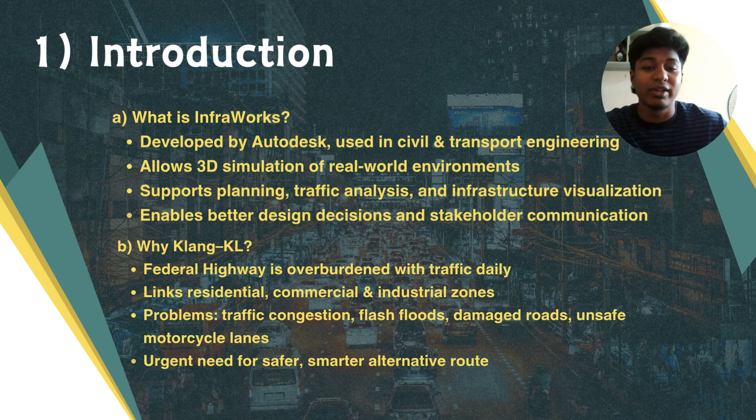Next we jump into the objective of our project. The first is to propose a new toll highway to reduce the pressure on the federal highway. Next, we want to incorporate smart tolling, solar powered lighting, an ITS system, and CCTV. We're going to design a safe, dedicated motorcycle lane. Then we want to build a flood resilient road section, especially in flood-prone areas like Klang and Shah Alam. We also want to use InfraWorks for simulation and planning.

This project also aligns with several sustainable development goals, which are SDG 3, SDG 9, SDG 11, and SDG 13.

The federal highway, the main artery from Bukit Raja in Klang to Kuala Lumpur, is facing five critical challenges that affect millions of daily commuters. First, critical traffic congestion. The highway has become notoriously clogged, especially during peak hours. What should be a seamless journey often turns into a frustrating crawl, with long delays and significant loss of productivity for road users every day.

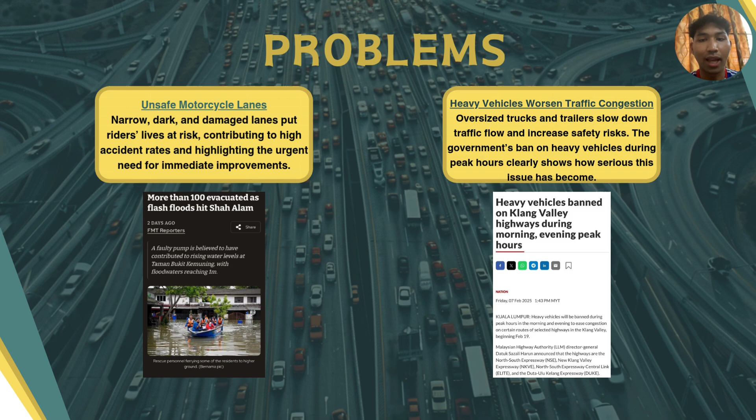Lastly, the issue of heavy vehicles worsening traffic congestion. Oversized trucks and trailers slow down traffic flow and elevate safety risks on already crowded roads. This problem has escalated to such an extent that the government has enforced a ban on heavy vehicles during peak hours in the Klang Valley, a clear indication of how serious the situation has become.

Next we move to the solution for the problem. The first is implementation of smart toll with dynamic pricing. This is to adjust rates during peak hours, for example higher charges during busy periods to discourage unnecessary travel, and applying an intelligent transportation system for real-time traffic monitoring and adaptive signal control.

Number 2 is 24-hour surveillance with flood sensors linked to the main server. The surveillance cameras use solar energy and water level sensors to detect flood-prone areas, and the data is transmitted to the main server within a 3 to 5 km radius for rapid response.

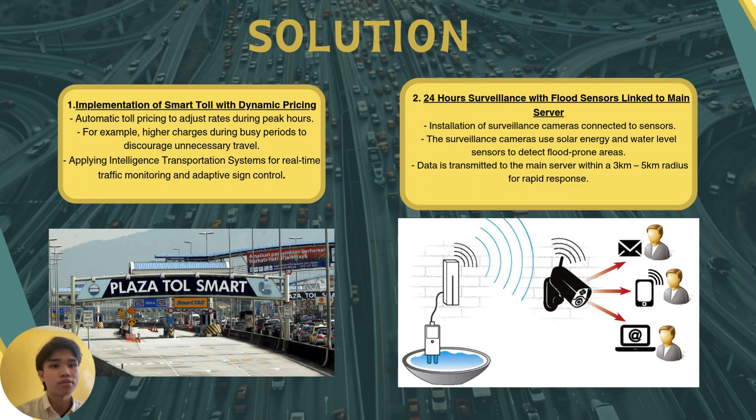Next is solar street lights with road damage detection, powered by solar energy and equipped with pothole detectors, using LEDs fitted with vibration sensors to detect road damage. Number 4 is dedicated motorcycle lanes with emergency call checkpoints.

We will construct wider motorcycle lanes separated by barriers with emergency stops every 500 meters, and we will also install surveillance cameras to prevent violations by the public.

Number 5 is enforcement of time-based heavy vehicle bans. We will ban lorries and trucks at peak hours, enforce the restriction by time slots, and impose higher tolls for non-compliant vehicles that violate the directive.

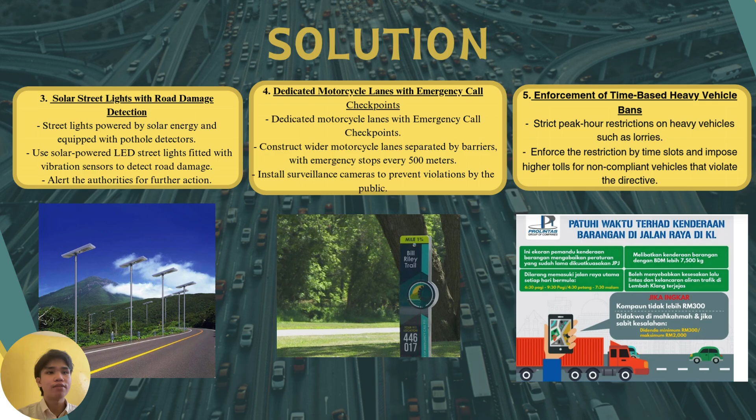Klang is currently ranked 87 in Asia and 422 globally in terms of traffic congestion. The average travel time for a 10-kilometer journey is 13 minutes and 9 seconds, with an overall congestion level of 17%, considered moderate. However, this still results in a significant 27-hour loss for drivers annually during peak hours, highlighting the real-world impact of congestion on productivity and daily life.

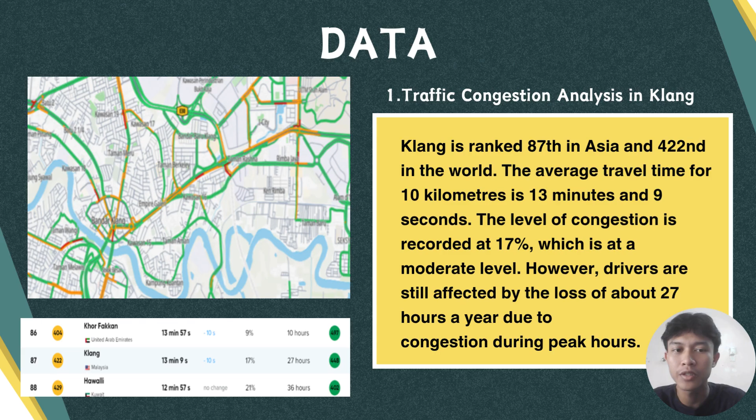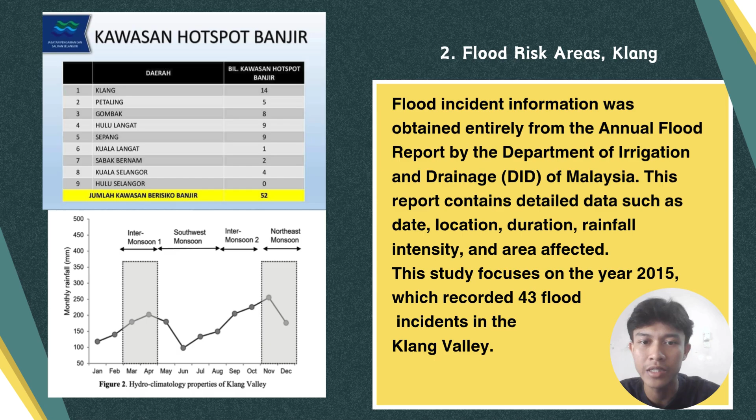Next, I will talk about flood risk areas in Klang. Flooding is another major contributor to traffic issues in Klang. According to the annual flood report by the Department of Irrigation and Drainage, Klang Valley experienced 43 flood incidents in 2015 alone. These incidents disrupt traffic, particularly on major highways, worsening congestion and increasing travel risks.

Next, I will talk about road damage complaints recorded in Selangor. From 2021 to September 2024, Klang recorded 312 road damage complaints and 17,687 pothole repairs. As Klang is both a major industrial zone and a key port, it experiences heavy vehicle traffic, frequent flash floods, and suffers from an inadequate drainage system. This results in rapid road deterioration, leading to chronic congestion and safety hazards.

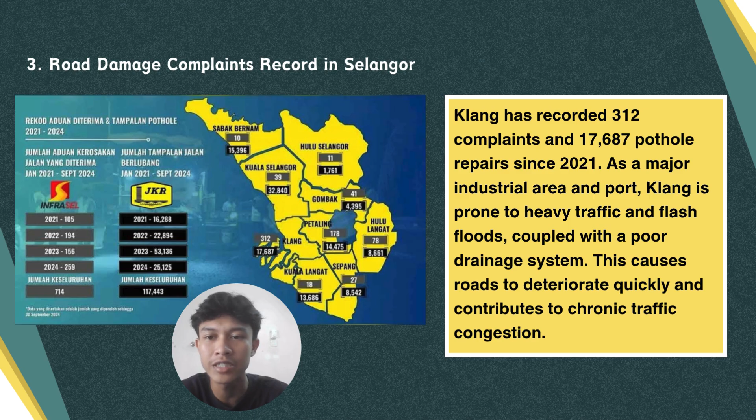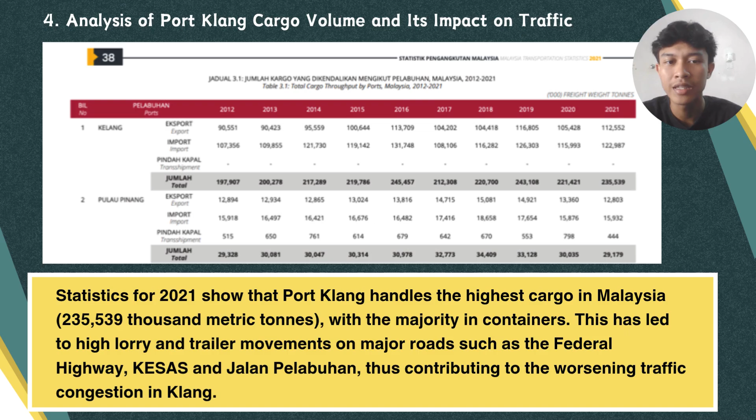For the last part about data, I will explain the analysis of Port Klang cargo volume and its impact on traffic. According to 2021 transport statistics, Port Klang handled 235,539 thousand metric tons of cargo, the highest in Malaysia, with most of it in containers. This massive cargo movement involves a high volume of lorries and trailers, particularly on Federal Highway, Kesas, and Jalan Pelabuhan, further intensifying congestion in Klang.

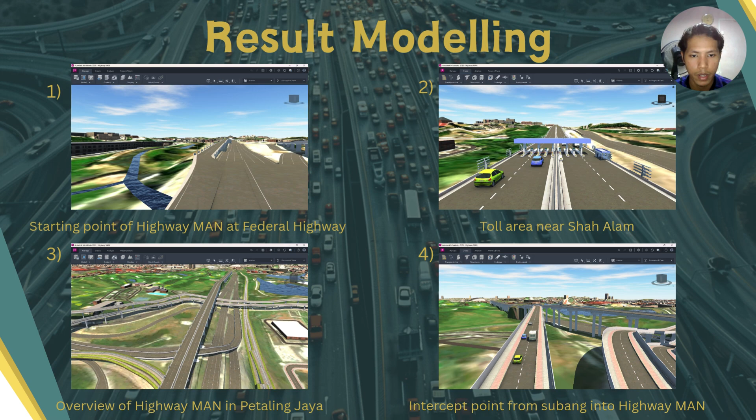We modeled the lanes and booths to reflect a realistic toll system in InfraWorks. The third picture shows an overview of how Highway MAN connects to Petaling Jaya with multiple ramps and interchanges for better traffic flow. Finally, the last picture shows where traffic from Subang joins Highway MAN. The merging design ensures safe and efficient entry.

So the first thing we're going to discuss is the major challenges along the line. We can see chronic congestion, especially during peak hours, causing stress, time loss, and low productivity. Heavy vehicles, especially from Port Klang, worsen the situation, increasing accident risk and traffic delays. These issues are directly linked to SDG 11, sustainable cities and communities.

The second point is environmental and road safety issues. Flash floods in Klang, Shah Alam, and Puchong frequently cause road closures and property damage. Poor drainage systems and unplanned urban growth make the region more vulnerable. Meanwhile, motorcycle riders face dangerous conditions from potholes and outdated plans, and the rising rate of commuting accidents is a public health concern.

This problem relates to SDG 3, good health and well-being, and SDG 13, climate action. The third point is our proposed solution. We introduced Lebuhraya Modern Arterial Network, a new smart toll highway that integrates adaptive toll pricing, solar-powered lighting with flood sensors, an intelligent transport system for real-time traffic control, and wider, safer motorcycle lanes with emergency checkpoints every 500 meters.

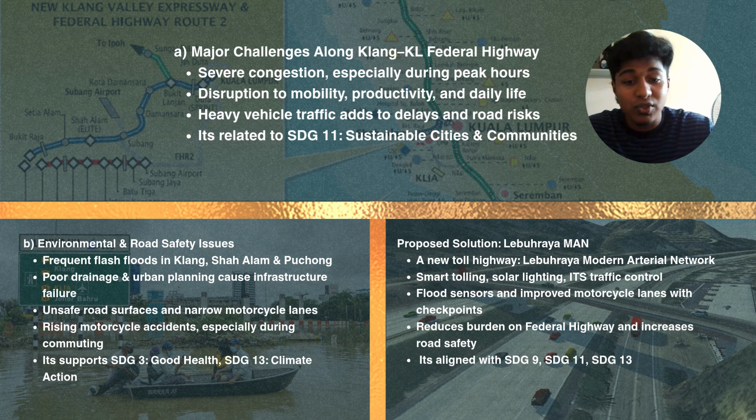This innovation will ease congestion, improve safety, and build a climate-resilient system. This aligns with SDG 9, Industry and Infrastructure, and also SDG 11 and SDG 13. So we have reached the conclusion part.

In conclusion, Lebuhraya MAN is a forward-thinking and sustainable highway project designed to tackle the core transportation problems between Klang and Kuala Lumpur. It directly addresses severe traffic congestion, frequent flash floods, road damage, and unsafe motorcycle lanes by integrating smart technologies, renewable energy, and resilient infrastructure. This project supports Malaysia's progress towards a safer, more connected, and greener future.

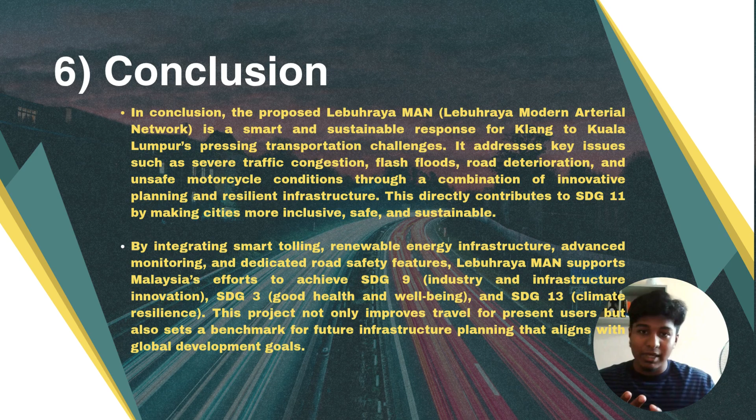Most importantly, it aligns with SDG 3, 9, 11, and 13, ensuring that infrastructure development goes hand in hand with health, innovation, sustainability, and climate responsibility. Thank you, and Assalamualaikum.